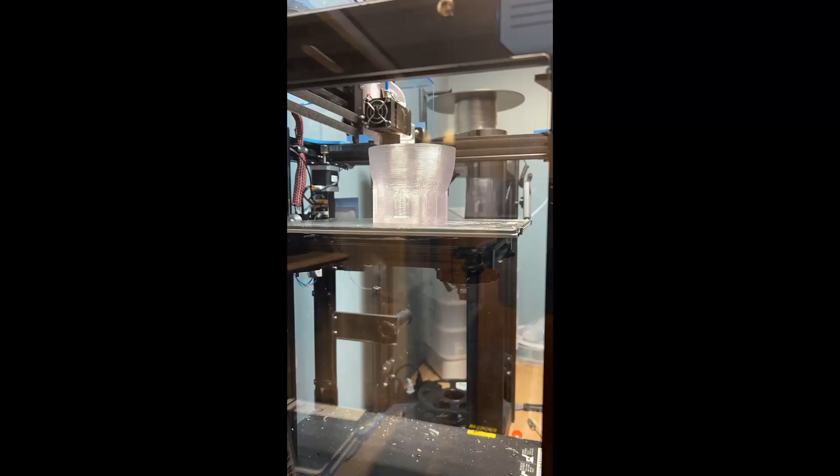So your flow rate is a measure of how much material your 3D printer can melt and extrude, in terms of millimeters cubed per second. The millimeters cubed comes from layer height in millimeters times line width, or perimeter width in millimeters. We're going to use perimeter width because we're working with Super Slicer and that's what they call it. The third factor is speed, in millimeters per second. So layer height times perimeter width times speed gives you your flow rate. Once you find your maximum flow rate, you can change any of those three parameters and maintain a printing speed that you know is your fastest way to get a good, clean print.

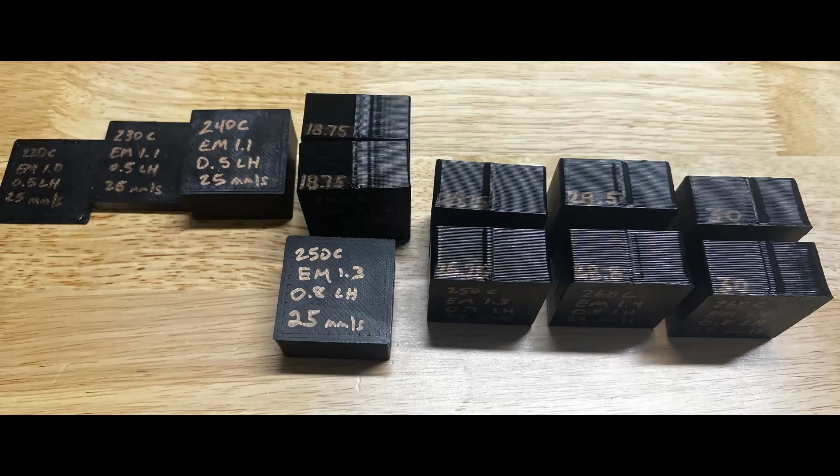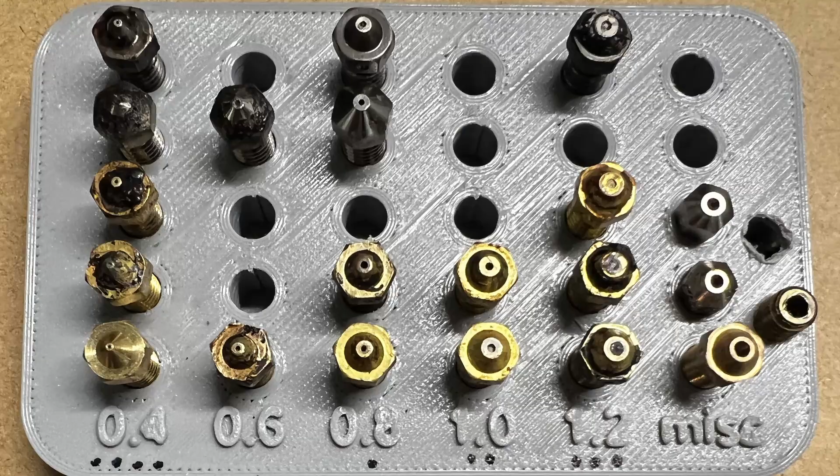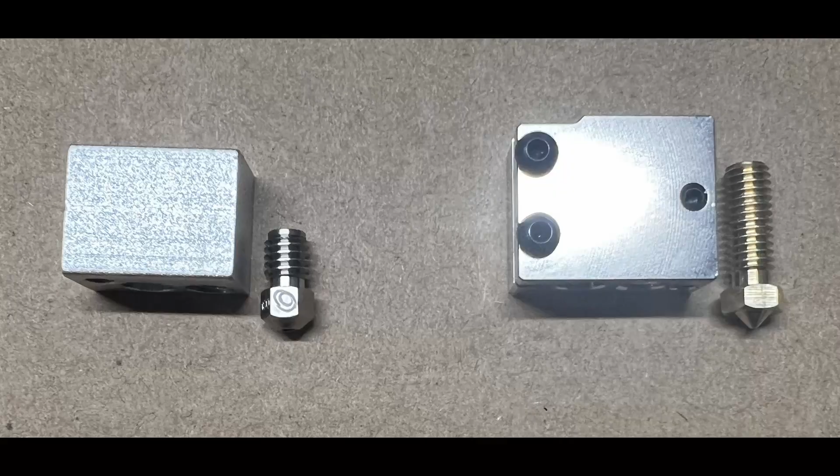Before we talk about how to do a flow rate calibration, we need to talk a little bit about nozzles. Nozzles come in different types and sizes. The different types could be the material - it could be a brass nozzle, hardened steel, or plated copper. Then there's also different types like an MK6 nozzle or a volcano nozzle. These are different brands made to work with different things, like the E3D V6 versus the E3D Volcano, which refers to the size of the heater block - the nozzle has to be the same size to fit into that heater block.

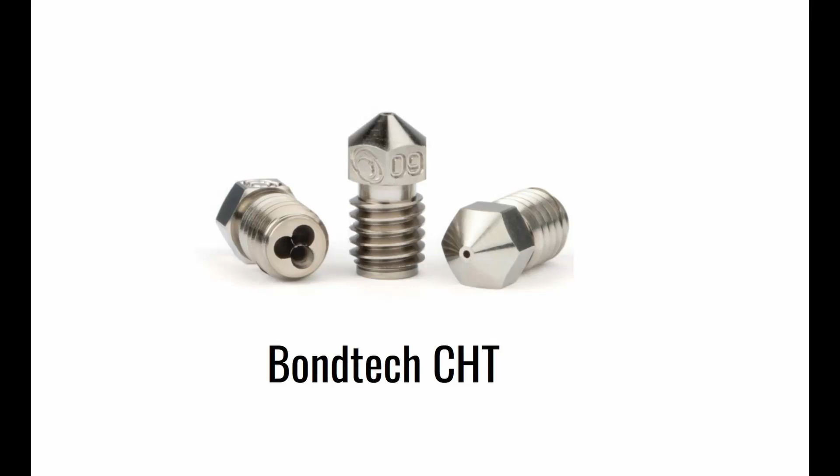The Volcano nozzle, for example, is longer than the V6 nozzles, and that gives it a bigger melt zone to help increase your flow rate by giving you more time to melt your material so you can push more of it faster. There's other nozzles like the Bondtech CHT, which comes in multiple sizes, but it has an internal geometry that even more effectively melts material. I personally use the 1.8 millimeter CHT to get as much flow rate as possible.

The other thing I do is pair that with a CNC Kitchen adapter - it's a volcano adapter for the Bondtech CHT nozzle. I recommend you check out CNC Kitchen's YouTube channel and his website. He really goes into the science of 3D printing and helps explain flow rates, extrusion, and all of these different topics in great detail. I've learned a lot myself from watching him, so check him out if you want a more in-depth explanation.

Whereas I'm going to mostly focus on how to calibrate this for specifically prosthetic printing today. So there's the different diameter of the nozzle openings, and then the other part that's important is the actual flat spot on the end of the nozzle, which in some part dictates how wide of a line you can print.

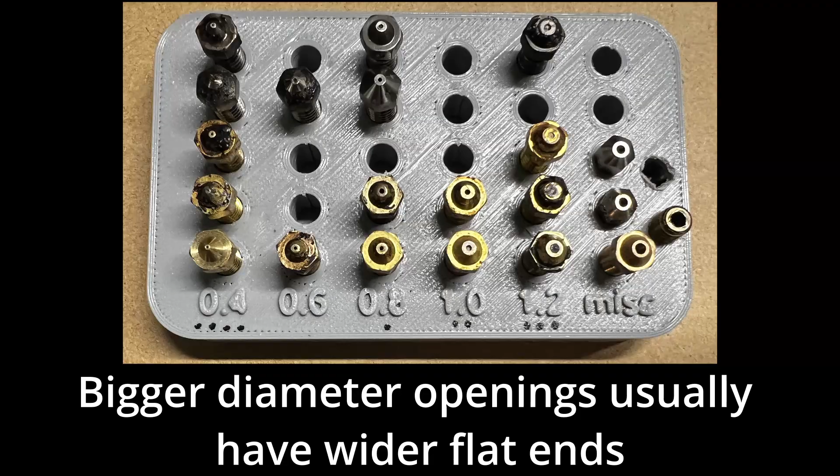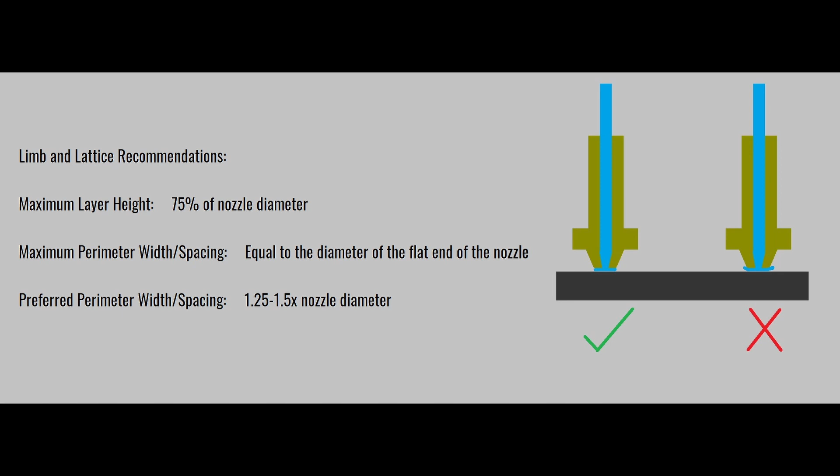When extruding, you don't want the width of your line to be more than the width of that flat spot on the nozzle, or you won't get good control of your extrusion to smash it into the layer below it. You also want to make sure your layer height isn't too tall for your nozzle diameter. Most people say not to go over about 3/4, so 75% of your nozzle diameter should be your max layer height. As far as line width, I like to go about 1.25 to 1.5 times my nozzle diameter because that gives me a good combination of fast printing, clean printing, and strong printing.

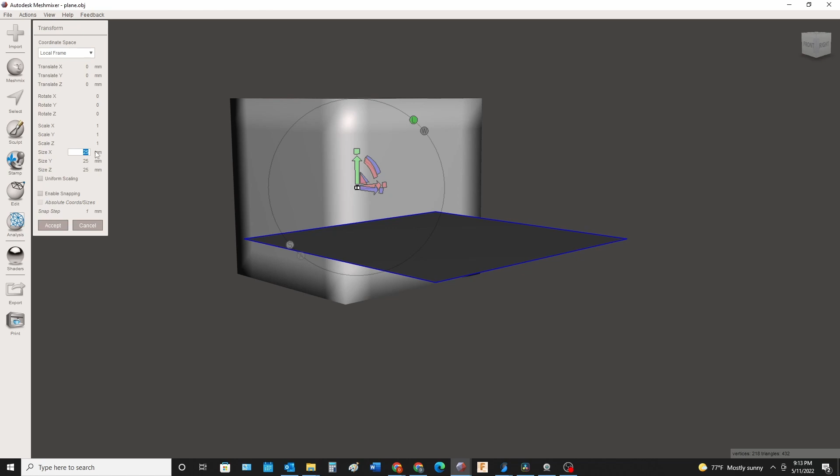Moving on to the actual calibration, first we need a shape. We're going to import a plane in Meshmixer, just to get started, and then you can Mesh Mix onto that and bring in the cube shape. I like to do mine 50 millimeters by 50 millimeters by 25 millimeters, and then you can orient that however you want - it doesn't really matter which one is which here. You'll set that up in SuperSlicer.

So create your shape, then you can delete your plane. After you turn on your object browser, you can select that, delete the plane, and then you have the shape you want to export and take that to SuperSlicer to start your calibration.

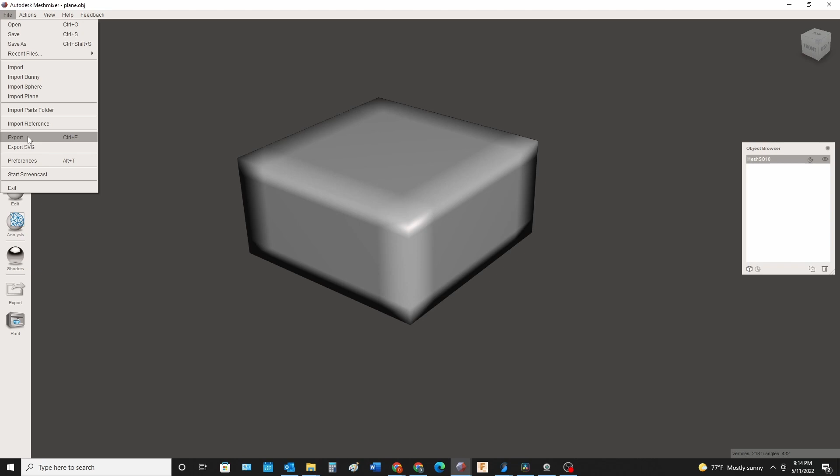So we load this shape into SuperSlicer and orient it with the 25mm in the Z height. I'll take you through the settings here. We're going to do 2 perimeters, 0 top layers, and 3 bottom layers.

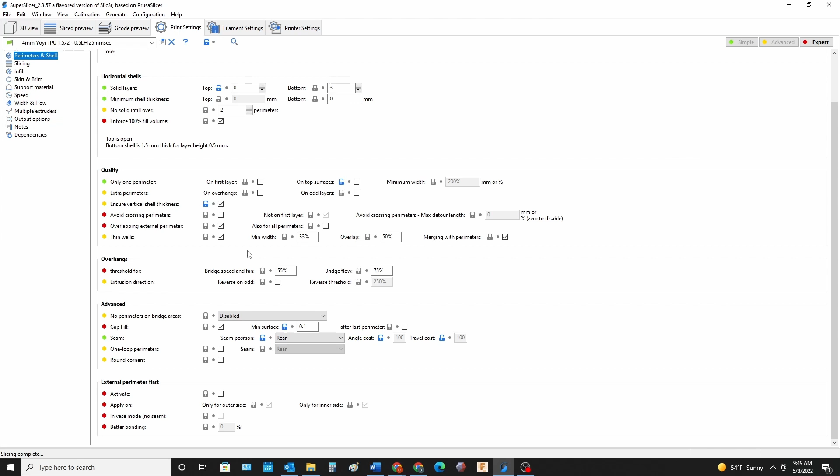This will be for a 3mm thick socket that I would use for a typical flexible inner prosthetic socket. We have a 0.5mm layer height, no infill. All we're trying to do is print some walls here so that we can measure them.

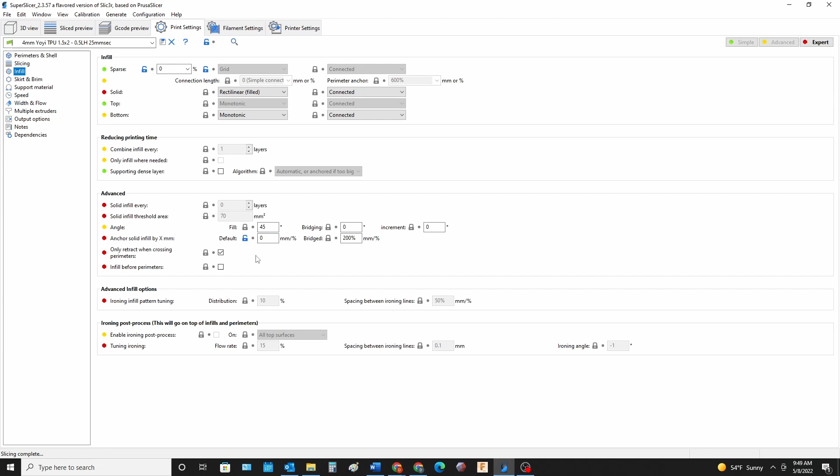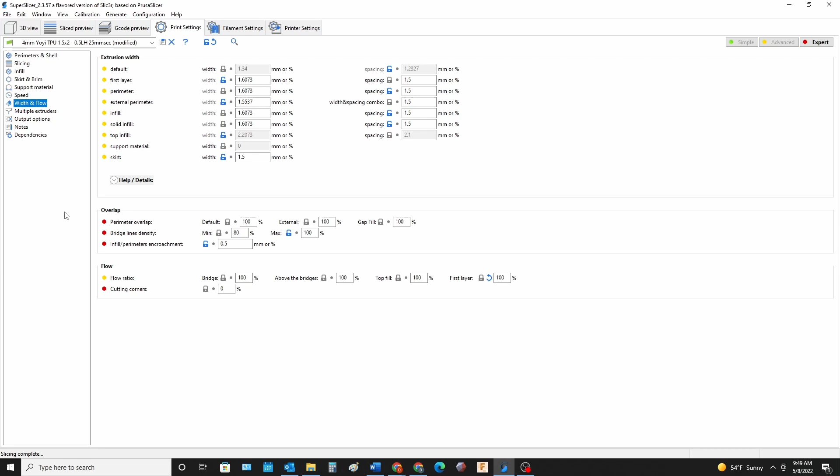You can see all the other settings we're using. I'm doing 1 skirt loop, no support material. Our speed, we're going to start at 25mm per second, which I know was good for most TPUs. Sometimes you can go faster. We're doing 1.5mm on the spacing, the width is a little larger. The help and details dropdown will tell you why we do it for the spacing—it's to end up with a perfect 3mm.

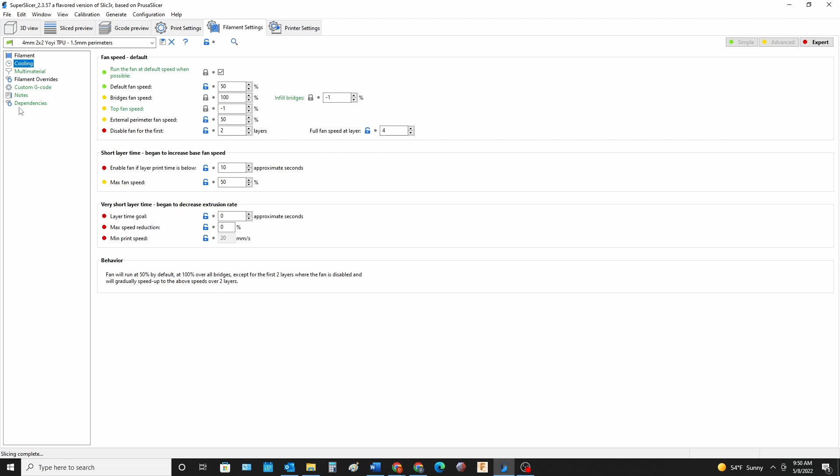And that's all for the print settings. Going to filament settings, we're going to start with an extrusion multiplier of 1 and nozzle temperature of 220, and bed temperature of 60 degrees Celsius. Shrinkage, we put 99—we know this is going to shrink just a little bit as it cools. We're doing 50 on our cooling fan, and these are just things that I know work for Yoyi brand TPU over time. Our retraction length is 2mm with a direct drive extruder.

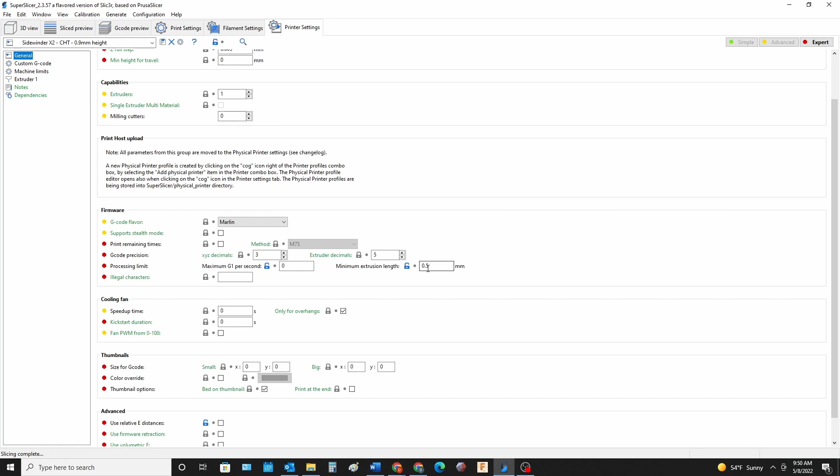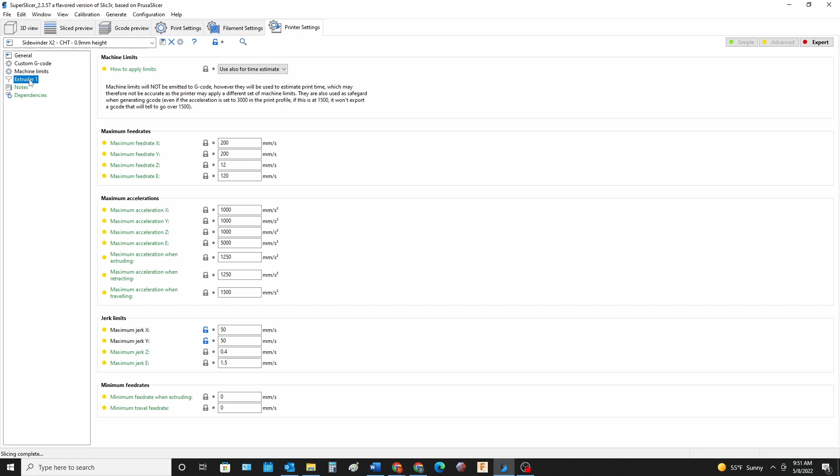Moving to our printer settings—this isn't the actual nozzle, we're using a 1.0mm nozzle, but make sure you have that minimum extrusion length set to 0.5 and not 0.035 like the default is. You can see my custom start G-code where I took out the bed leveling because we don't want to do that at the beginning of every one of these prints. We're going to run a handful of these and we don't want to waste time on that. You can just see the other settings, so stop and pause the video if you need to get these set up to use TPU.

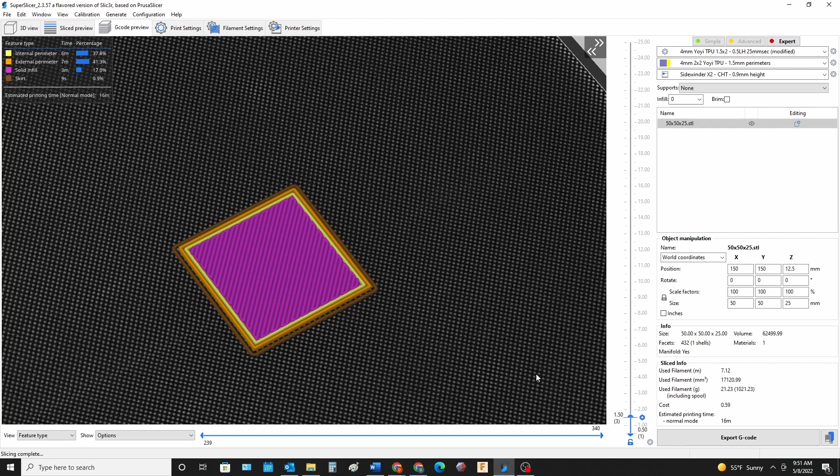Now your brand might be slightly different depending on what you're using, but this is what the shape should look like once you get those settings, and this is what we'll use for the calibration. So check that, and then you can export that, and we are ready to print.

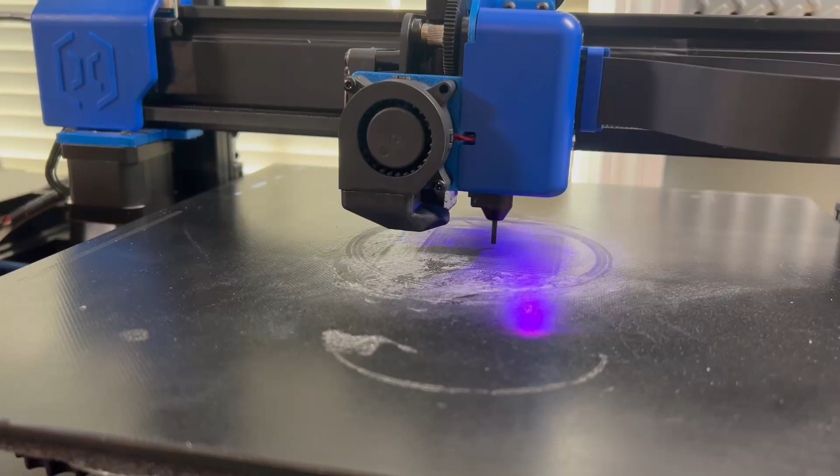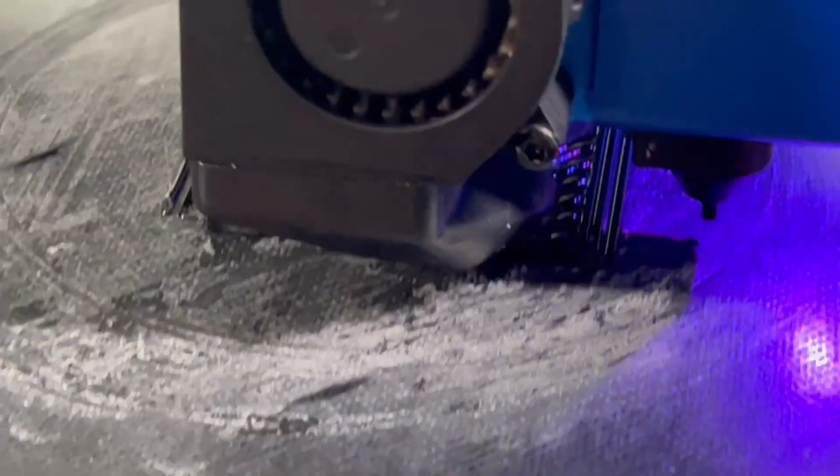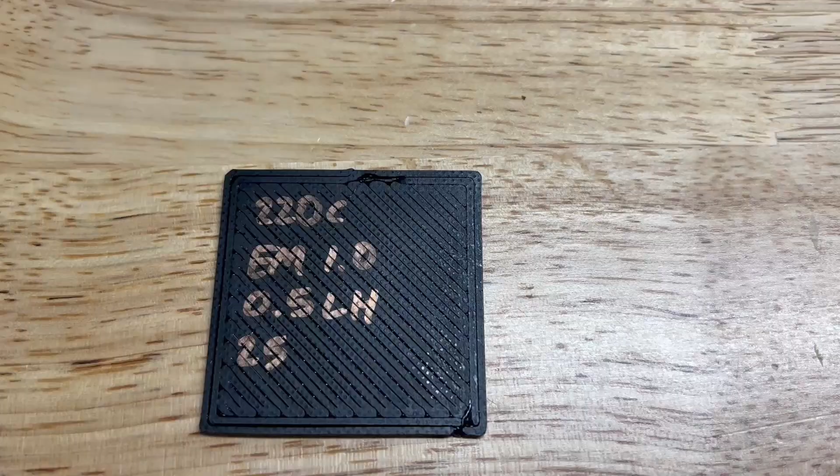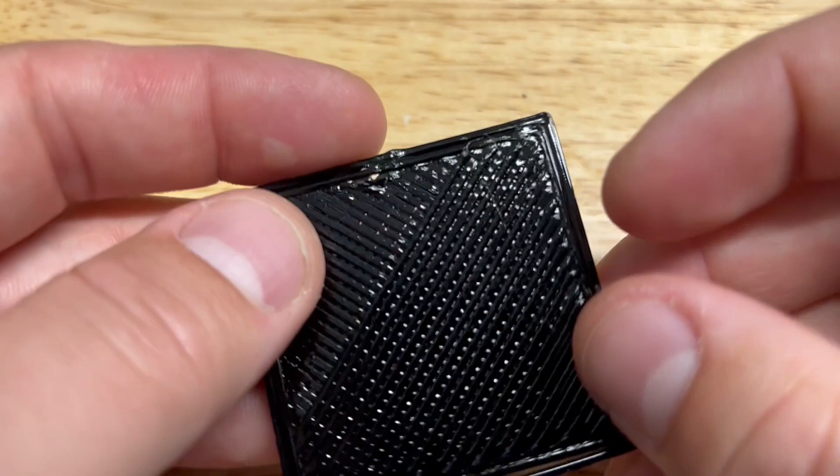Now there are several things we're looking for—it's not just the thickness of the walls. We're also looking at the base layers, and those are our first sign of how things are going. So this is 1.5mm width, 0.5mm layer height, and a speed of 25mm per second for a flow rate of 18.75 millimeters cubed per second. I could see right away that these lines weren't connecting well, they weren't thick enough, which tells me something with my settings is not right—that I'm not getting proper extrusion for that flow rate. You can see the gaps between them here. So we know that 220 degrees Celsius and an extrusion multiplier of 1.0 is not going to be proper settings for this level of flow rate.

So while we would normally only change one setting at a time, this one was pretty far off. So a quick calculation to verify that flow rate again, and then we're actually going to increase both the temperature and the extrusion multiplier to get started, because we weren't where we needed to be. We're going to go from 220 up to 230 degrees Celsius on the nozzle temperature, and take that extrusion multiplier from 1.0 up to 1.1, and then we're going to run the test again and see what that looks like.

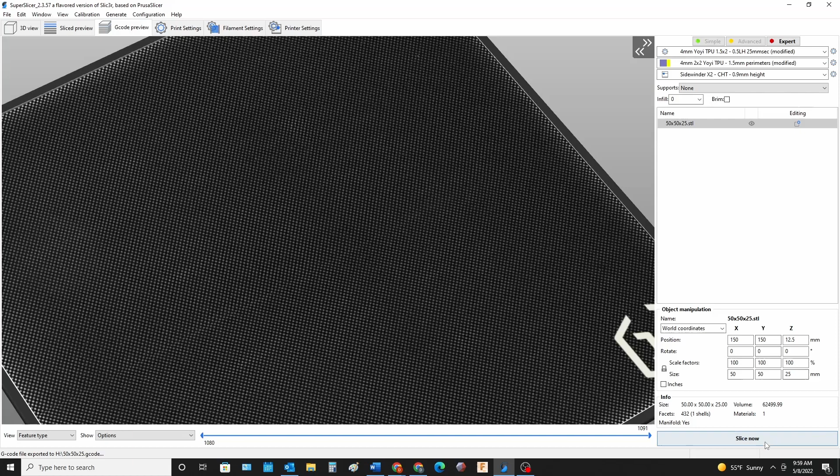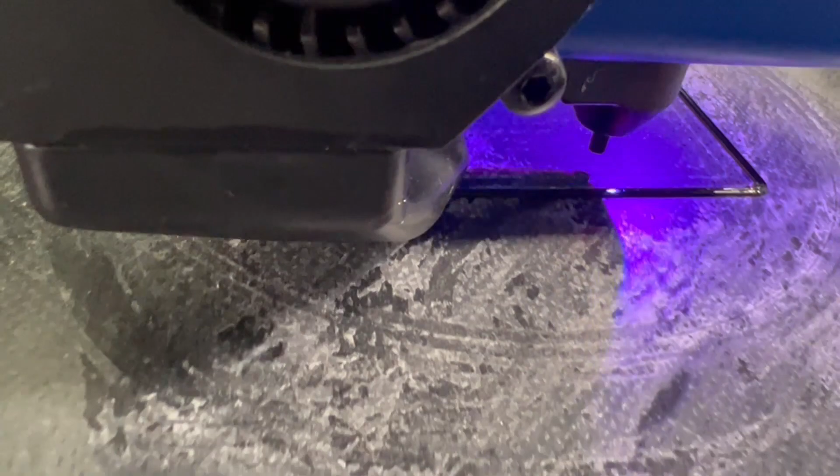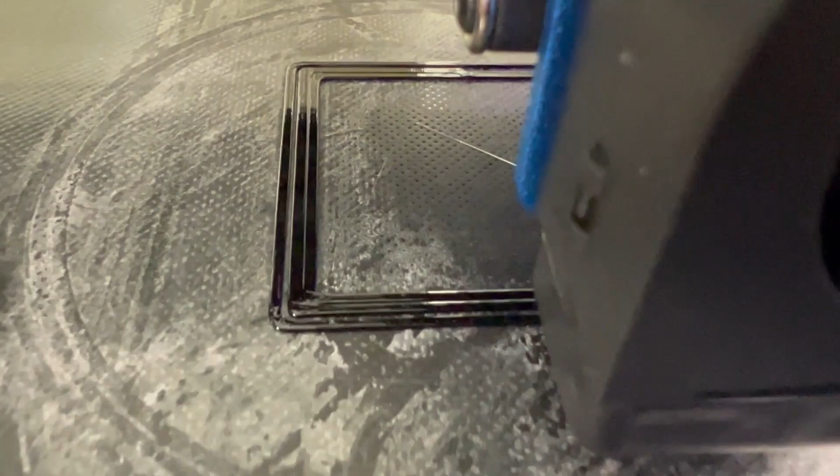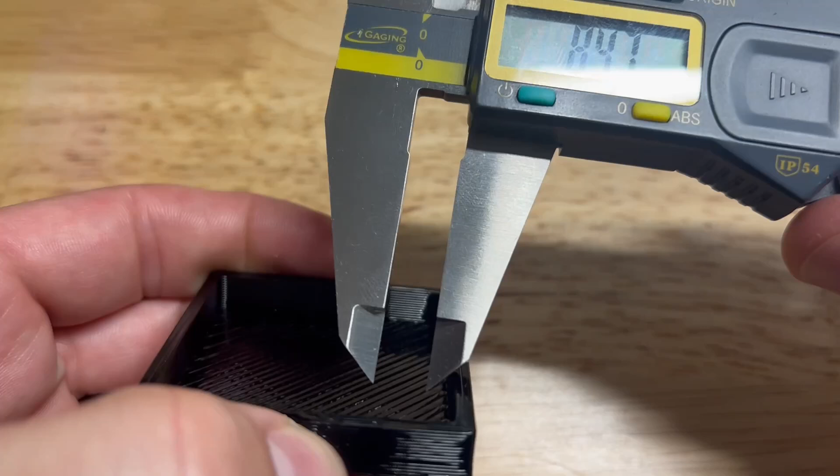Right from the start, I could tell this one was looking better—these lines were closer together, and it was enough that I was comfortable letting this one run a little bit so that I could measure some of that wall height as well. You can see we're still not connecting there, but we had enough to actually see what that thickness was, and we were at 2.78 when we wanted 3 millimeters. So we need to make some more changes: we're going to go from 230 degrees up to 240 degrees Celsius, which is getting near the high end of the TPU range, and we're going to run that one more time.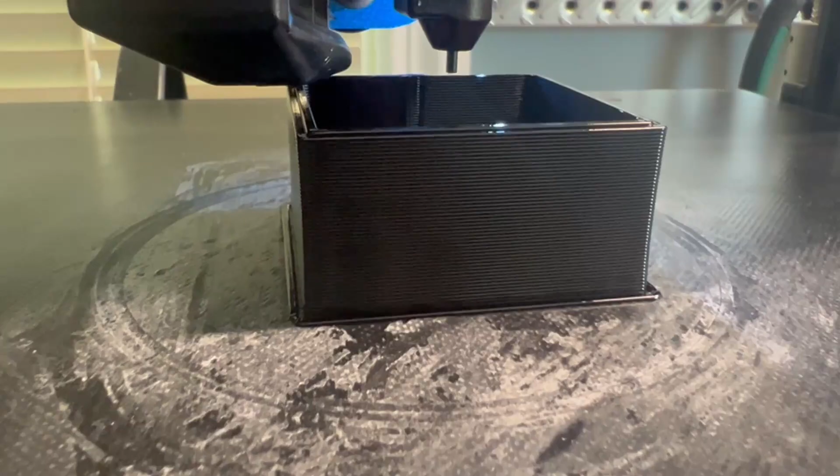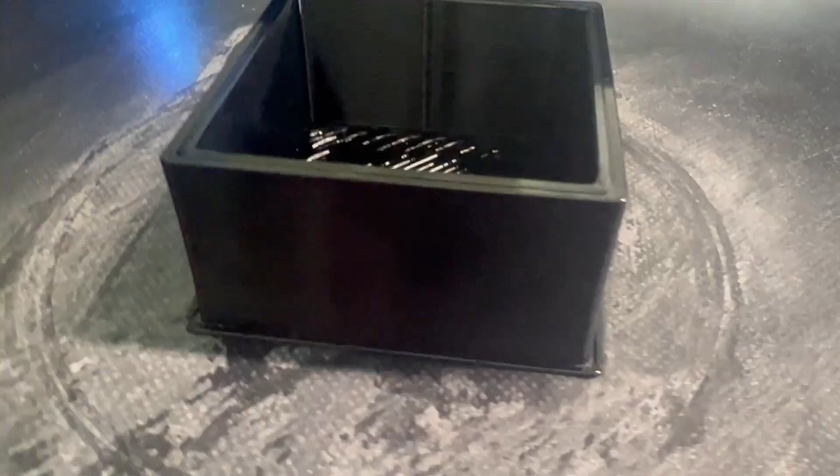This print looked pretty good, so I felt comfortable letting this one run to the end without feeling like I was wasting material or time, so that I could get a full look at what it was going to be. The print quality looked excellent—I was really happy with how that one ran, but looking down in it again, we can see there's still just a little bit of gap.

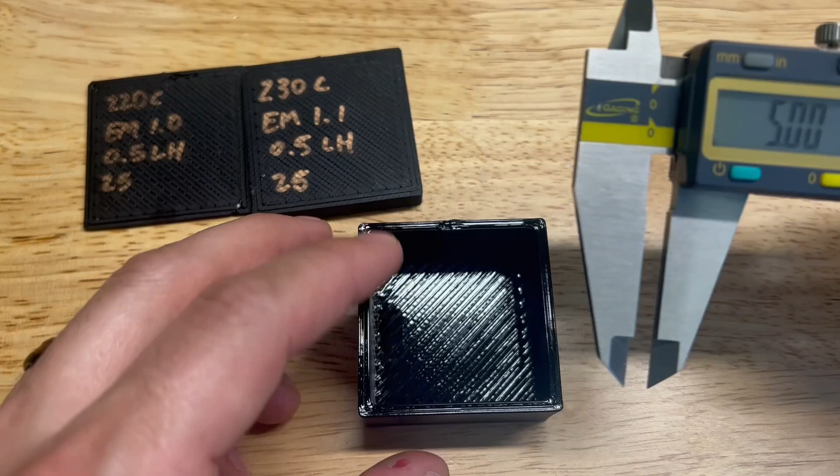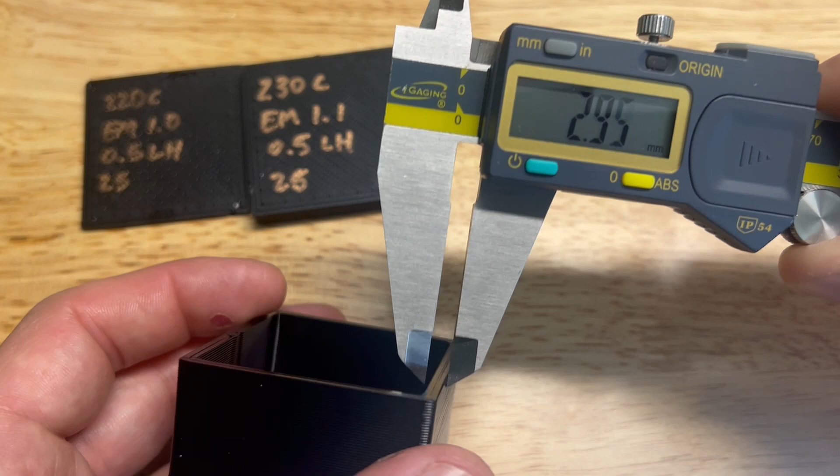Taking our measurements, we're just a hair under 3 millimeters still. I'm taking those measurements at the center point of each of these walls, just trying to grab the top couple layers or millimeters. We don't want to go across the whole surface of the print, or we might introduce some variation.

We're a little bit off, so we have a couple of options for how to address this from here. We were at 240C and an extrusion multiplier of 1.1. I decided to do two tests, bumping each of those up independently a bit to see where we get to.

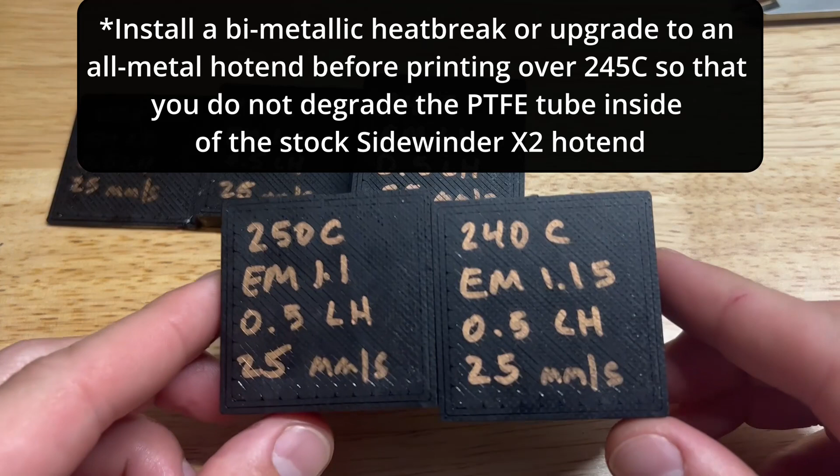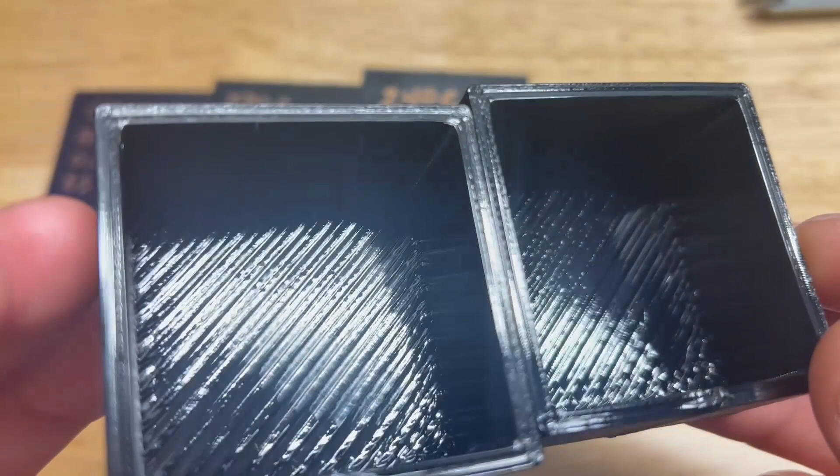250C with a 1.1 extrusion multiplier, and 240C with a 1.15 extrusion multiplier, both gave me prints I was very happy with at an 18.75 millimeters cubed per second flow rate. Measuring my walls, I had some measurements just over and some just under 3 millimeters, which is exactly what I'm looking for.

You're never going to be perfect, there's going to be variation. So as long as you're within that 0.1, you have a very nice print.

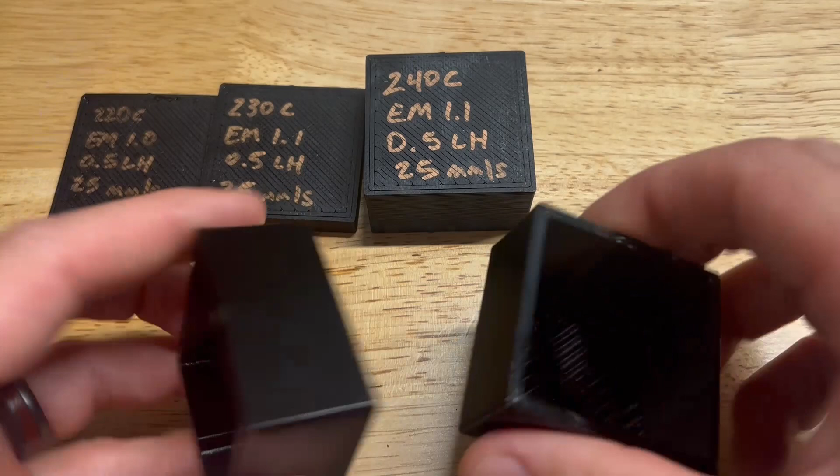The next step is to see just how fast we can print a flexible inner socket by changing our flow rate and increasing that. I wanted to go all the way up to a flow rate of 30 millimeters cubed per second, which is a speed of 40 millimeters per second, while maintaining a layer height of 0.5 and a width of 1.5.

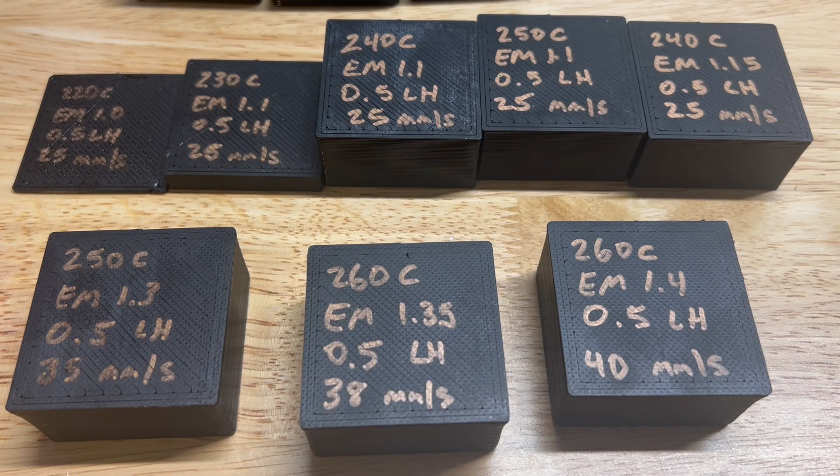At this point, I want to talk about why sometimes we pick temperature and why sometimes we pick extrusion multiplier as ways to increase total flow rate. When looking at temperature, some of that comes down to the material. If your material doesn't do well at higher temperature, you might start to degrade the material properties if you try to print it too hot—you could actually start to boil it off in a way.

On the other side, extrusion multiplier comes down to your design and how you plan to print and what you plan to print. So if you're printing a prosthetic socket that's 3 millimeters thick the whole way through, and you just need that high flow rate for the best speed and print time possible, then you can set that extrusion multiplier higher without any issues.

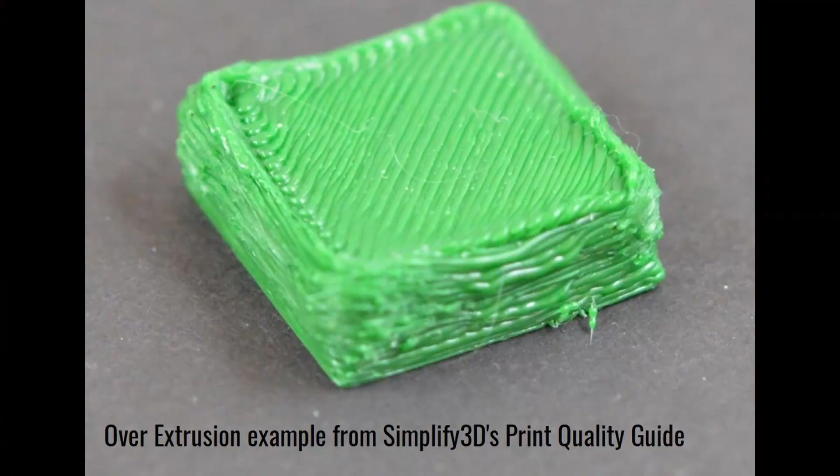But if you're going to have parts of your print—maybe doing some other type of printing or something more complicated—where not all of your lines within that print require that high flow rate, then using that high extrusion multiplier is actually going to end up over-extruding other parts of your print potentially.

So we went all the way up to 30 millimeters cubed per second on our flow rate. I wanted to figure out the settings for 30 millimeters cubed per second because that's been shown to be the high end of what you can realistically get out of a volcano nozzle and a volcano heater block. That's what the Sidewinder X2 comes with, a volcano style. So that's why I wanted to go all the way up to 30.

Now other things, like the Bondtech CHT nozzle we talked about—when I've put that in this printer with the volcano adapter, I've actually been able to get up to 42 millimeters cubed per second. That's a significantly higher flow rate, which has allowed me to decrease my print times and make my prosthetic sockets much faster.

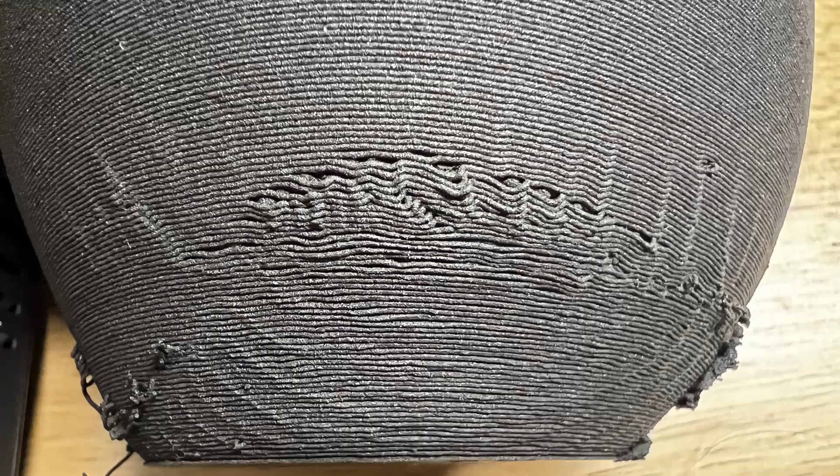So you always have to figure out what is your limiting factor with how fast you can print. In this case, we took our print speed up to 40 millimeters per second. I'm not really comfortable going faster than that with TPU, especially this brand of TPU, because that's where quality starts to decline.

So other things you could do to increase your flow rate and print sockets faster while not going over 40 millimeters per second on speed would be to maybe increase your layer height. If we know we want to keep that at 1.5 millimeter width times 2 perimeters to get the 3 millimeter socket, you could try upping your layer height while maintaining your speed to actually get a higher flow rate and print sockets faster.

You could also look at it and say with that 1.8 millimeter CHT nozzle, the flat end on that nozzle is a full 3 millimeters thick. So that opens up opportunities to look at whether you can print with a single perimeter, and how fast you could do that going all the way up to that 42 millimeters cubed level.